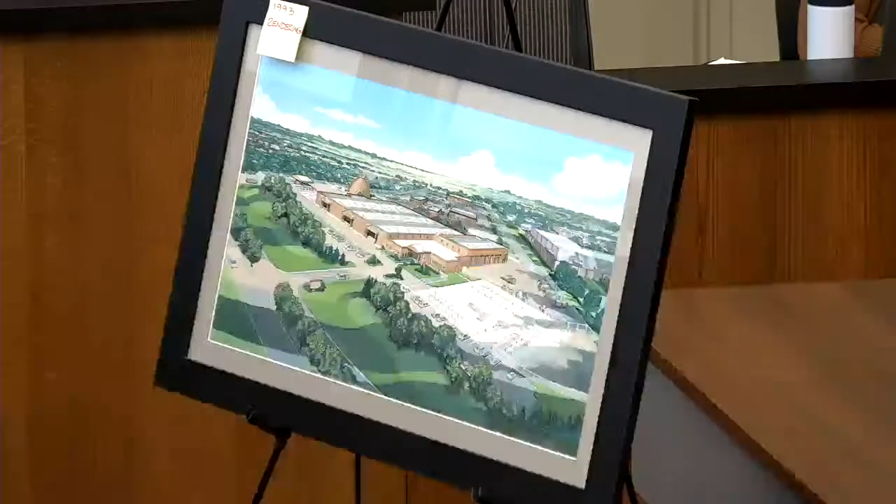Ironically, or more foreshadowing, we have a 1993 rendering of the public works site to the right, which showed a much larger bay area, which the plan is to kind of meet that vision. Back in 1993, they didn't do all of that design. They also didn't demo the old 1960 building, and we didn't build a salt dome. We just added that a little bit after 1993. So, I did this last time too.

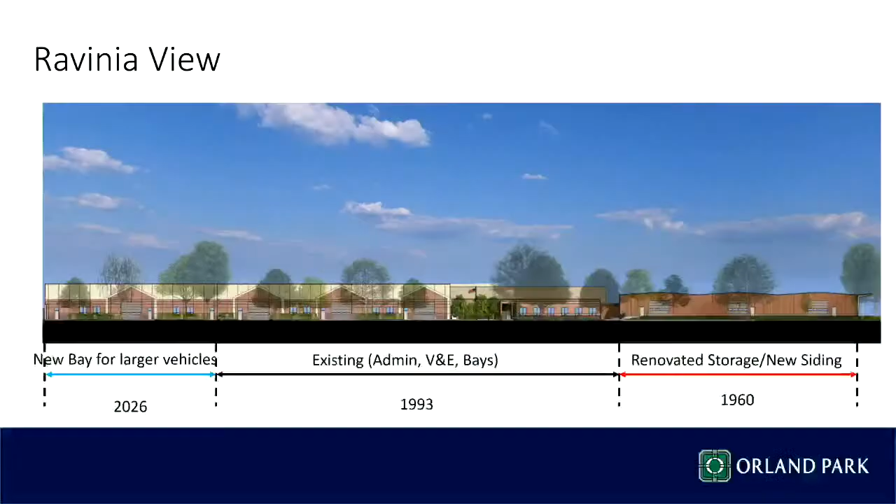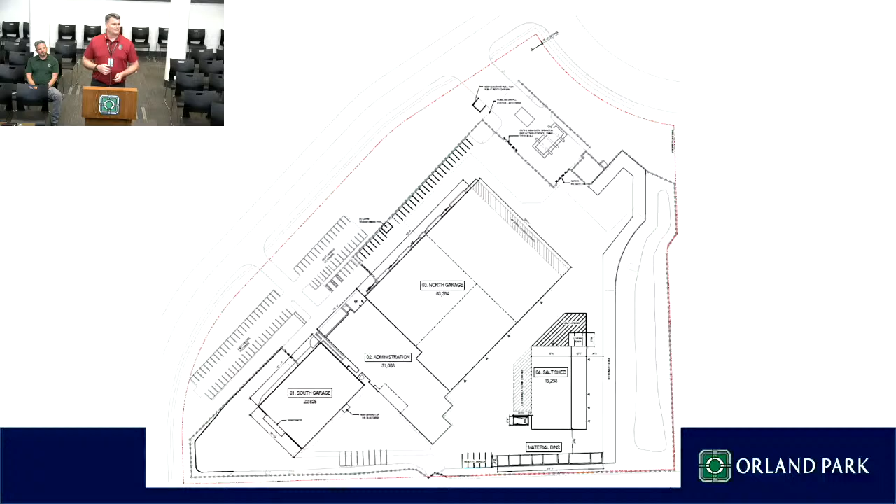We wanted to keep the look the same for the facility, so the addition would have the same archway into the larger bay area. So that's what you see from Ravinia. Also, we are recladding the old building because a lot of the insulation is falling apart and falling down. So we want to bring that building up because we're going to turn that into storage and also shop spaces. So in order to do that, we want a cohesive look for the site. And here's the site - we also are doing a salt shed.

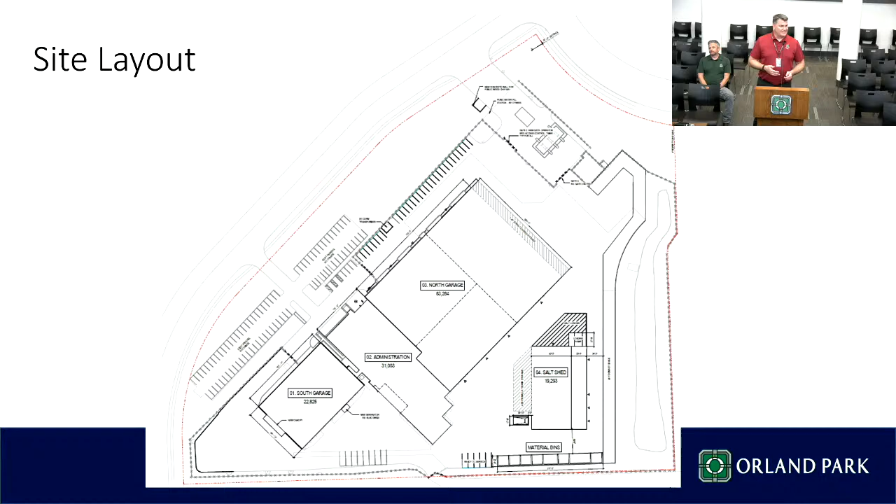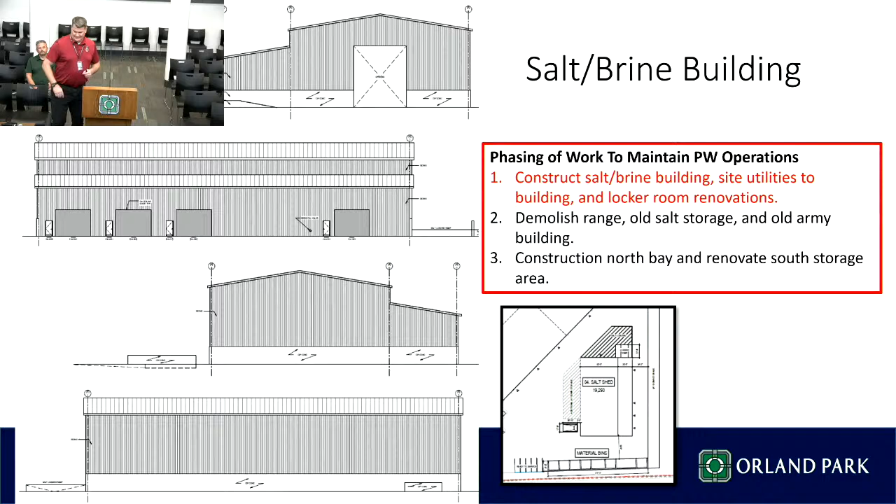So I'll just go over a little bit of the order of what we're thinking of doing on the site. The first thing for the construction phase is to construct a salt and brine building. This would be back in the dirt area of the site here. The building would be put in the back here.

So the building would be built in the back, to include material bin areas back here. This pulls a lot of the Public Works stuff to the back of the site, away from public viewing.

Also, the brine and salt building would be back here. We're trying to reduce our salt usage—it's an EPA rule we have to follow for the village—and use more brine. The brine mix is also better for the roads because it sticks, versus salt bouncing off to the side and getting into our streams.

Because of this, the building has both functions, as you can see in the drawings above. The building has push wall concrete, so when we put the salt in there, it keeps the walls from pushing out. Above it, we're cladding it to match the old building with the same metal sheathing, so the whole site will have that particular look and color.

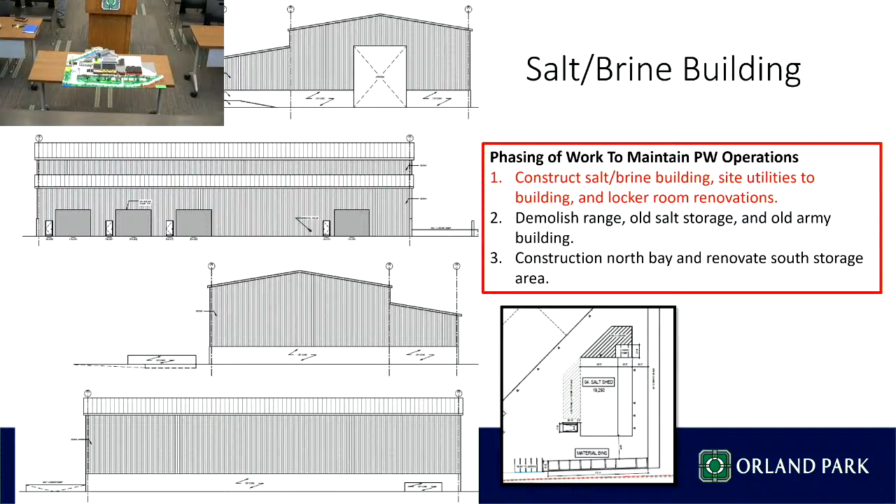You don't see a push wall on the east wall, the second one down, because it's behind where the brine tanks will be—it's hidden inside the building. So that whole salt area will have that protection for the push walls.

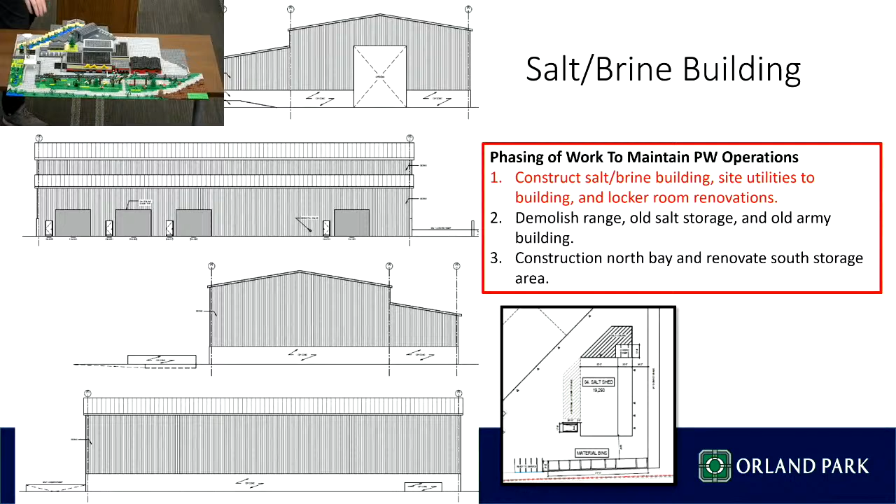The next thing we're going to do on the site—sorry, next page—we have an old range building. The new range building is almost complete, and we'll have a ribbon cutting here very shortly. So the old range will go away.

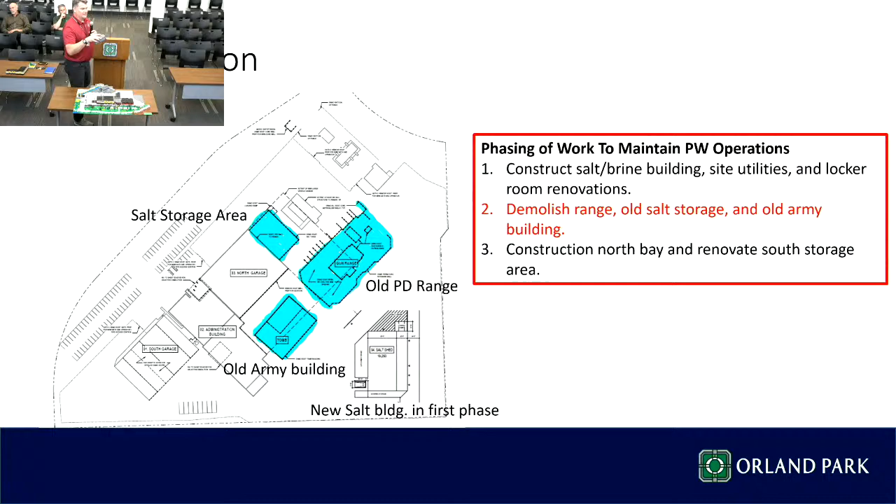We have an old army building that currently holds the brine, but it doesn't have containment for spills. So one of the things the new building has is containment inside, so if a tank ruptures, it doesn't get into the storm system.

The last piece is the current salt area. Some walls are starting to push because of the salt, so we've had to support some walls that have shifted. We also have a lot of pitting and corroding of the overhead joists, so we need to fix that—we can't have the salt corroding that area.

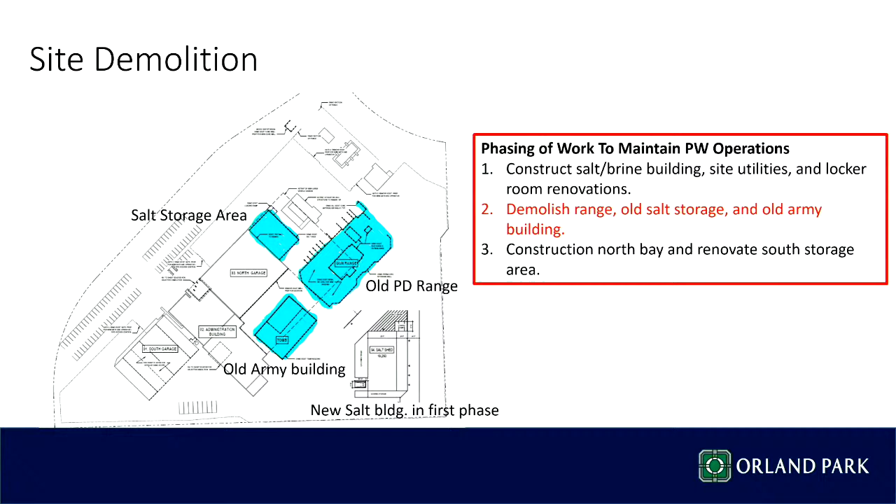So once we do that demo, the last step is to actually build—all the vehicle storage will now be on this side of the building, which looks like that large square area.

Some vehicles are in this building, some behind it, some in front. We have a lot of vehicles, and if kept outside, it degrades them. Storing them inside extends the lifespan, meaning more savings for the village. I'm trying to reduce that cost with this project by having storage in that area.

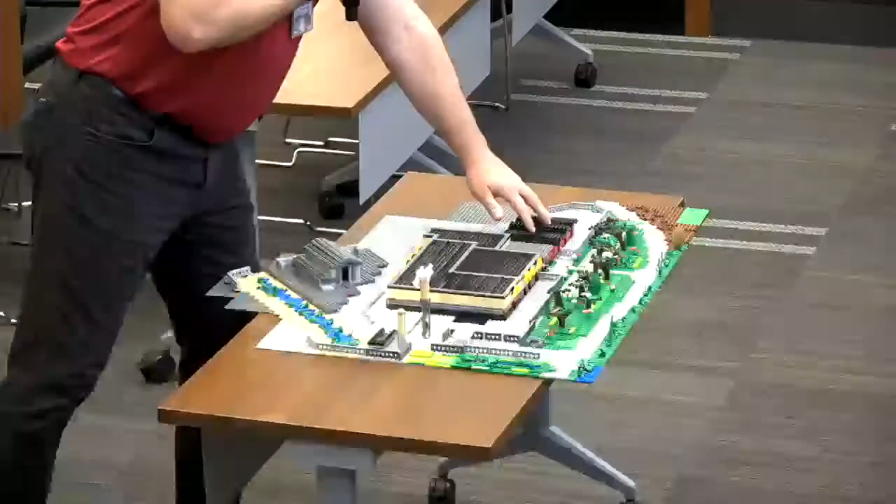The last area is to renovate this into storage—the older building and shop space. We have a lot of spaces spread out across the village: Old Village Hall, rec admin, the basement of Village Hall. These are areas Mike's team works out of, and they can be consolidated to one location, allowing more storage space and program space for rec programs and so forth.

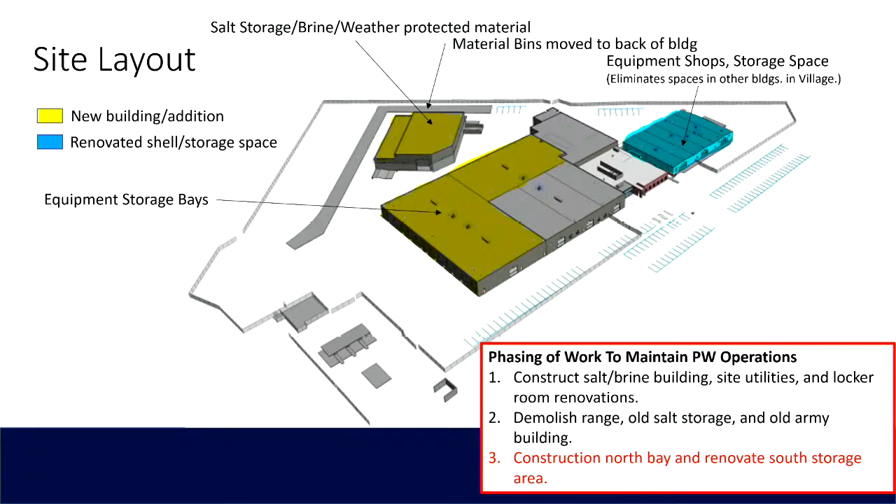I think that's the overview of it. I can turn to whatever slide you like, and then we can answer any questions you have on the project.

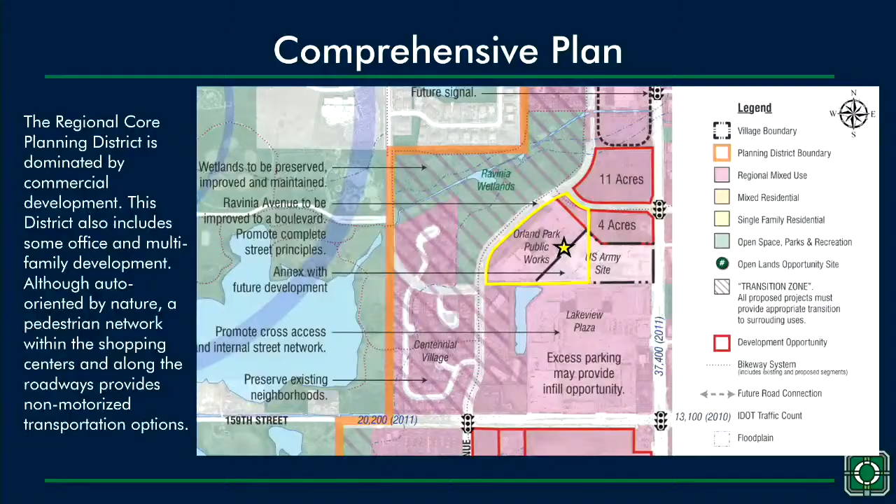Here's an image of the regional core planning district from the comprehensive plan. The property is bordered by wetlands to the east, vacant land to the north and west, and residential to the south. This can be seen in this recent aerial image of the property as well.

I won't go over the whole background of the property—Joel did a good job with that. However, I wanted to mention that the property has been rezoned and expanded over 4 separate parcels. There are currently 5 buildings on the site. The main building houses their administration, the south garage, and the north garage. There's also a tomb, which is a storage building, along with the gun range, and 2 smaller buildings.

As part of this project, the tomb, gun range, and the 2 smaller buildings will be demolished to accommodate the new site improvements. So the first request tonight is to rezone one of the 4 parcels from OS open space to the core mixed use district, just to make the zoning consistent with the use of the property.

Shown in the image here, there's an oddly shaped parcel, which is the green one, the OS district, that we're requesting to be rezoned to core mixed use.

As part of any rezoning project, the petitioner responded to the LaSalle standards to verify that the proposed zoning matches the intent of the comprehensive plan and the current and surrounding uses of the property. The responses were sufficient for staff.

They discussed that the site will continue to be used as the public works facility, and the site improvements will benefit the surrounding area overall.

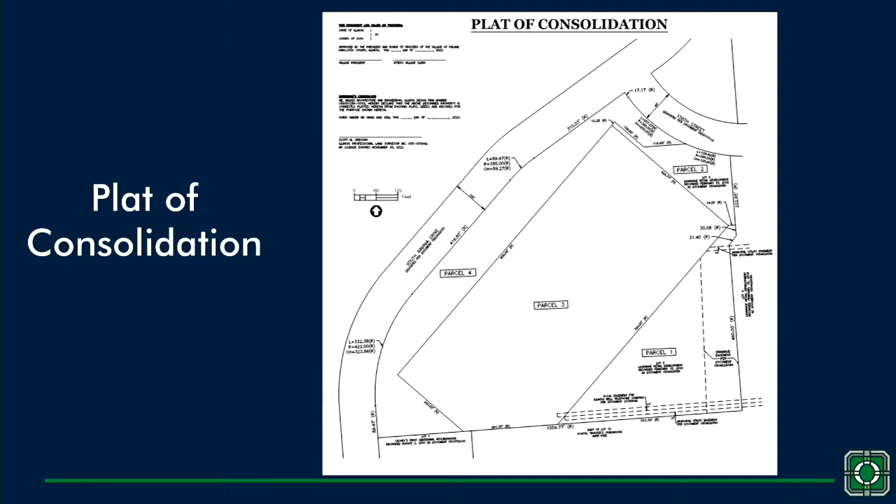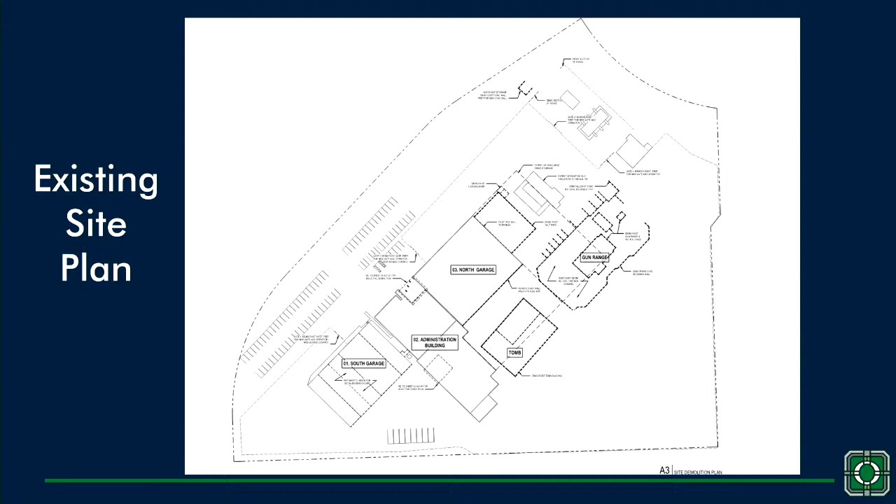Moving forward to the site plan, this is the existing plan where we can see the layout of the buildings in relation to the entire site. Joel went over this in great detail, so I'll move on to the proposed site plan.

The north garage addition is approximately a little over 62,000 square feet, while the new salt shed is about 19,293 square feet. Due to the size of the salt shed, this is considered a second principal structure on the lot, which then triggers the requirement for a special use permit for the planned development.

Moving on to the building elevations for the north garage, which Joel shared as well. As you can see, the proposal is to continue the existing architectural features on the building to allow for more seamless design. However, this does require a modification from the Land Development Code in regard to our design standards, because it doesn't meet our brick and masonry requirement for non-residential buildings in the village.

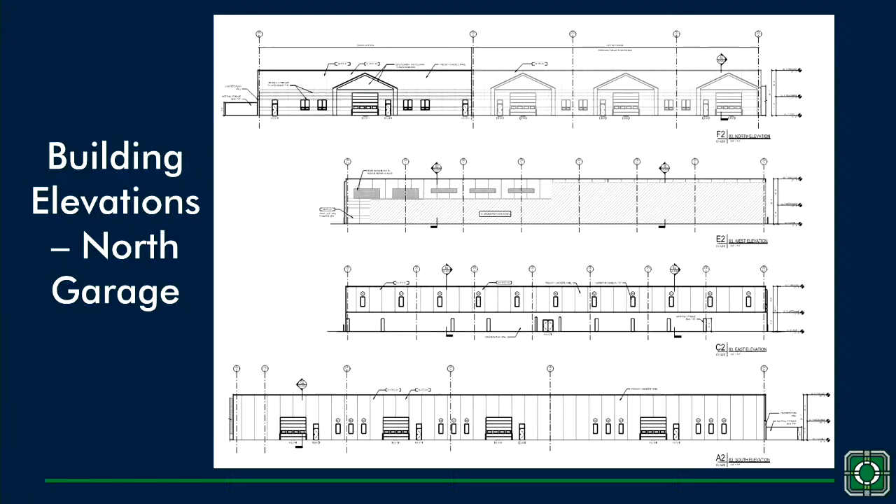As Joel shared as well, here is a rendering of the building elevations. The only thing that has changed since this plan was provided is that the material storage bins on the side are actually being moved to the rear of the site, south of the salt shed. Those darker squares outlined show where the material storage bins will be located, as opposed to the side of the north garage, which is actually being converted to a more lay-down storage area.

There's also going to be lay-down storage on the perimeter of the site, to the south. This won't be very visible from the public right-of-way—it'll be mostly screened by an existing fence and existing landscaping, and due to the layout of the site with the buildings, it'll provide a lot of coverage so these won't be very visible from the public right-of-way.

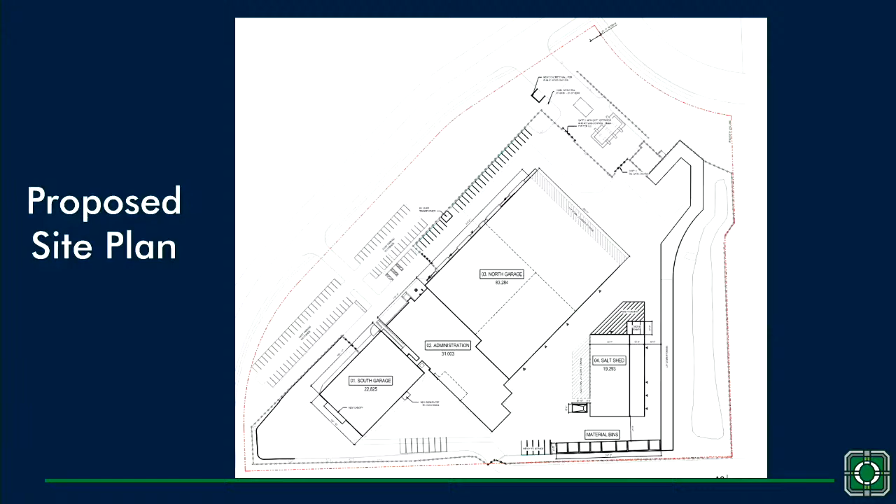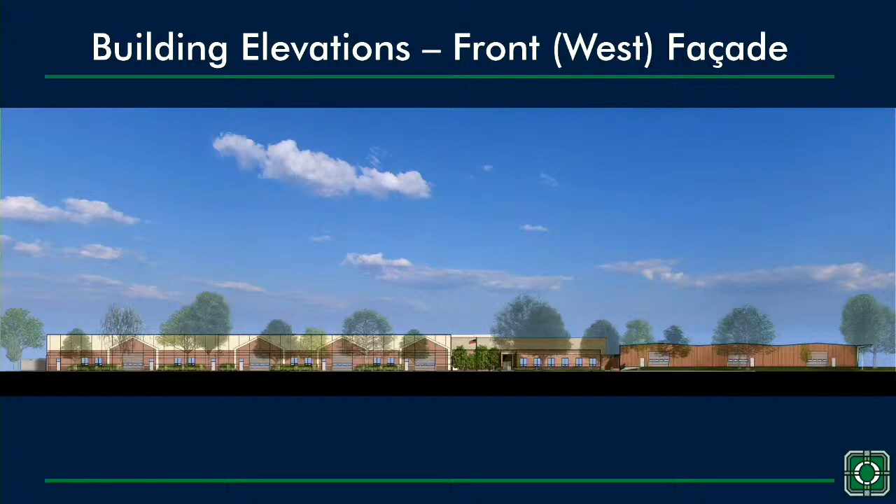Here's another building elevation, which Joel also shared, showing the entire front west facade, where you can see all three portions of the structure. The salt shed will mostly be hidden in the back, at least from this facade.

And I believe Joel mentioned this, but the storage of salt requires certain building materials just to ensure minimal corrosion and deterioration of the structure, which is one of the reasons why the brick and masonry requirement cannot be met for this structure.

So the petitioner has also responded to the special use permit standards. Their responses discuss that the permit will allow for the continued use of the site as the public works facility, and it will ultimately benefit the community by optimizing the salt storage and general operations for public works.

So as mentioned previously, both the addition to the north garage and the new salt shed will not meet the brick or masonry material requirement. So this is considered a modification in association with their special use permit for the planned development.

As sort of to offset this modification, they're proposing to plant additional trees on site. So they're actually requesting two modifications. The first one is for the building material. The second one is to eliminate the requirement to provide parking lot landscape islands.

Since this project involves slight modifications to the parking lot, this triggers the requirement to bring it up to code in regard to the parking lot island landscaping. However, just due to the unique conditions of the site and the regular use of larger vehicles, snowplows, etc., staff is in support of this modification request. And again, to offset this request, they're going to be planting additional trees above and beyond the parking lot landscape island requirement. So this is a substantial improvement to offset their modification request.

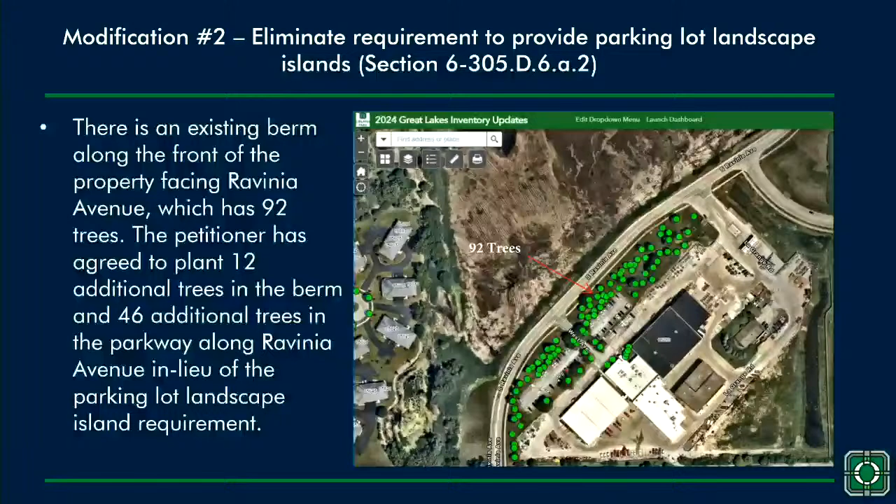Okay, and then moving on to the staff recommended action. This is a bit of a longer one today, so it spans over multiple slides. So I'll read through the whole thing just for fun. So regarding case number

2024-0892, also known as the Public Works Optimization Project, staff recommends to accept and make findings of fact as discussed at this Plan Commission meeting and within the staff report dated May 29, 2025.

And staff recommends the Plan Commission approve a rezoning of one of the four parcels from the Open Space District OS to the Mixed Use District COR. And staff recommends the Plan Commission approve a plat of consolidation prepared by Valdez Architecture and Engineering, revised April 28, 2023.

And staff recommends the Plan Commission approve a special use permit for plan development with modifications from the Land Development Code, subject to conditions 1 and 2. And staff also recommends the modifications, as I mentioned previously in the presentation, 1 and 2.

And staff recommends the Plan Commission approve a site plan prepared by Valdez Architecture and Engineering, revised January 16, 2025, subject to the condition that the development will be in substantial conformance with this preliminary site plan. And staff recommends the Plan Commission approve building elevations prepared by Valdez Architecture and Engineering, revised September 20th, 2024, subject to the condition that the development will be in substantial conformance with the preliminary building elevations.

And this is the recommended motion, and this concludes staff presentation. Thank you. Thank you.

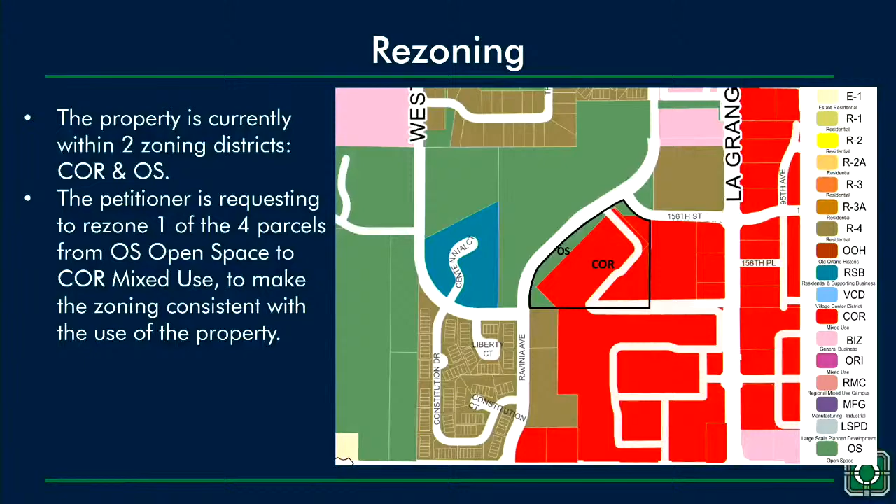No, that's zoned COR. Who owns it? Just a private entity. Okay.

In planning this, we thought about the development of that and what its potential uses are? Correct. I believe it's part of a planned development with the Seasons 52 and the other outlots there. They were all part of one development at one point, but the larger parcel just never was developed.

Do Seasons 52 and the other stands utilize the detention that we have, or do they have something separate? Does engineering know? What happens to the drainage for them?

For this development, the stormwater is conveyed to the existing detention pond in the southeast corner. As far as Seasons 52's detention, I'm not sure, I didn't look into that. I don't know if Joel or Valdez did. I'll say if and when that vacant parcel is developed, adequate stormwater detention would be required for it.

No, I get it, I'm just wondering if those two are already going there now. To be honest, I have not been in Seasons 52, I've been in the predecessor. They don't have outdoor dining in the back, right? If they utilize it, it's in the front, right?

So us putting a salt shed in the back, we haven't affected their view, right? Correct, and there's a fence there, and I don't think that's one of our concerns. Okay, I just wanted to detract from that.

What's the height of the salt shed? It's pretty tall, isn't it? Yeah, it's 43 feet. Okay, that's what I was thinking about for that.

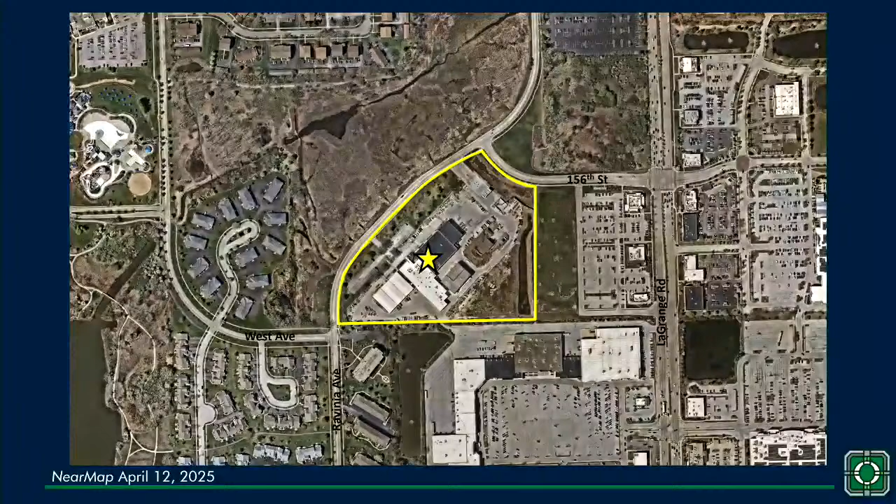So when this is done, are we literally - you said it, and I'm just doing it more for the public that looks at it later - all vehicle storage in town is gonna be here, everything related to public works, because everything's coming there. So, I'm not even sure, is the old village hall coming down?

But you guys utilize part of that. So after this is done, you're not utilizing the old village hall or any other sites? No, public works vehicles would be at the site. We planned about 10% extra just in case there's growth, if we have to have more trucks to do salt operations, say, in the farmland, if those become developed.

But we'll still have Village Hall vehicles here. Parks still has their vehicles near their garage, and they have the buses down here. Police have their vehicles too. I just meant you guys though - so Public Works everything-wise is... So you're gonna be completely removed from the old Village Hall. Yes, correct. You are currently there, right? Correct, and you have been there. Correct. Okay, and then...

And then again, with the environmental stuff with the salt, because you're putting in the concrete walls and all that, we're not worried about salt emitting and getting into the detention stuff? Because we're doing concrete, we're gonna completely eliminate any ability for the salt to mix with water and escape. There's one thing I didn't mention - we actually have worked with a company in Wisconsin.

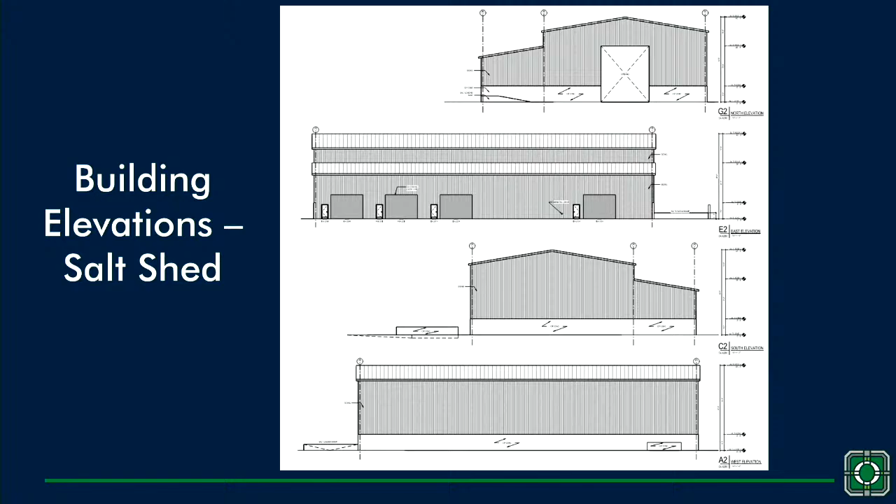This is interesting because I was involved in the development of the 1993 building, that picture. And at the time, the decision was made not to build what's in the picture for financial reasons. So now we're back a few years later because we have need.

When I was on the board, I think the projection was at build out, which should be when 95% of the vacant land is built upon, the population would be somewhere around 80,000. Is your projection that this addition will take us to build out, that we won't need any more additions? That is the plan.

Because we can multi-use the aisle space, even if we needed a truck to be pre-staged and then launch in the morning. So not only the parking spots, but we have aisle space too. So yes, we can accommodate that as the village grows.

All right, so this should be the last addition. Besides, I think you're out of space. I'm kind of out of space there as well, so we'd have to build another site.

What is laydown coverage storage? What is that? So we factored that a couple of things could be - a laydown area might be like light poles. We're not gonna store that in the building, but we need some areas for light poles. Utility has manhole covers, manhole rings and so forth. Dumpsters, natural resources as maybe trees that may get delivered, and we're gonna plant them, so we have to store them away from the sun for a while until we can get them planted. What other things? Okay, I get the idea.

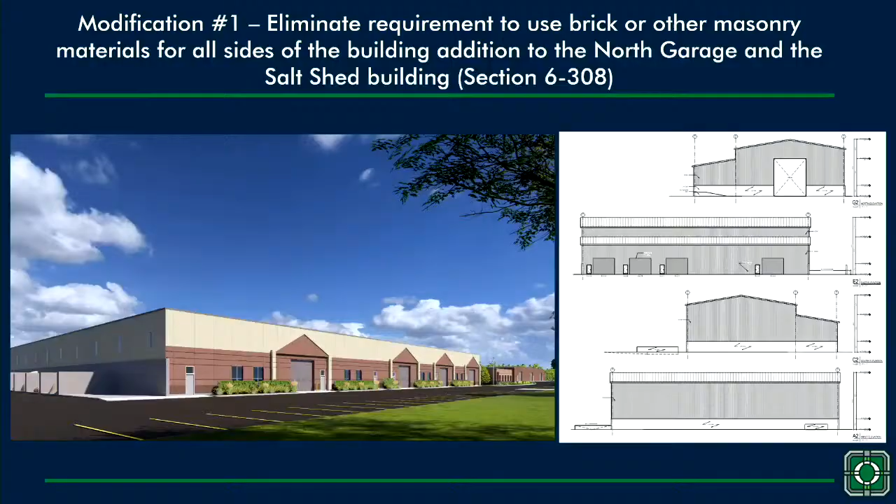Sir, you need to be sworn in because this is being recorded. Welcome to the podium, please. Do you solemnly swear or affirm that any testimony you present tonight will be the truth and nothing but the truth? If so, please say I do. I do. And again, for the record, your name and address. Steve Enoch, reside at 4110 Riverview Drive in St. Charles, Illinois.

Okay, so the exterior walls are precast concrete panels. They come in, I think, 15-foot or 12-foot sections. They just crane them up, put them down. And for the brown part, did we decide on a paint color? Yeah, it's a paint color that's going to be on the bottom part of the precast concrete panels.

Okay, thank you. I don't have any problem with that, other than the fact we're doing something that we wouldn't do given a variance - we probably would have a big issue giving the same variance to a private party building a similar building. So we just have to be cognizant of that.

The same thing with the parking islands, although there's more of a justification there because the parking area is kind of narrow, as I recall, so that's easy to justify. But I guess we can justify it by the fact that we're just matching what was done in 1993 - and I think they did it in 1993 to save money, quite frankly, because there was a big to-do at the village board level about whether we should even spend any money on public works, which was a policy issue. There were people involved in village government at the time that didn't think public works really needed resources.